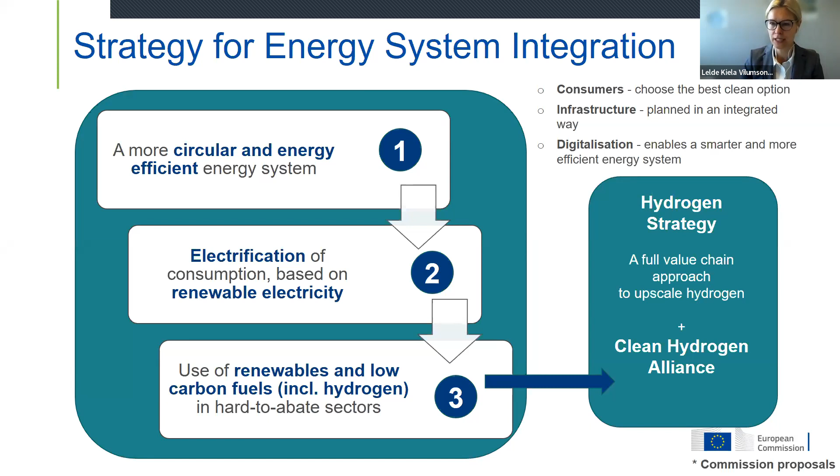And now I will give you a short update on the actions which were also announced in the strategy. I will focus on my slides, given the time limit, just on the key actions which really are relevant for this webinar.

In terms of the first pillar of an efficient and circular energy system, we see that the Commission guidance to member states on the energy efficiency first principle, which was announced in the strategy, was adopted last year in September. It is also key in terms of how we can make integrated systems more efficient.

The energy efficiency first principle is also embedded in the revised Energy Efficiency Directive, which was adopted as part of the Fit for 55 package last July. And the review of the primary energy factor, which was also announced, is in preparation, and it should be adopted by the end of this year.

And then the reuse of waste heat from industry and data centers, which is a key element of how we link together different sectors, industry with heating systems, was also provided or included in both the revised Renewable Energy Directive and the recast Energy Efficiency Directive, also adopted last July.

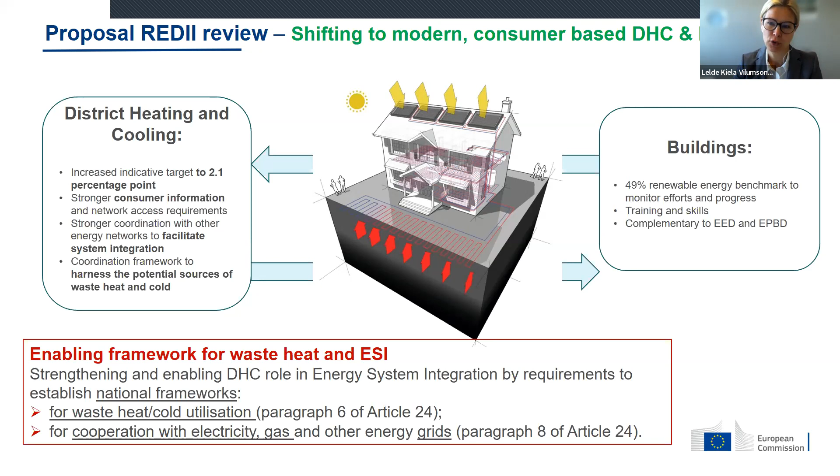And I will now finish here, and you can come up with questions, because I know I don't have much time left. So in relation to the REPower context, it's important, in terms of heating and cooling, to...

acknowledge the really necessary, massive acceleration of renewables in order to shift away from Russia's fossil fuels. And this is clearly indicated in REPower, as Emilie also mentioned. So there is a push for a high penetration of heat pumps, also solar energy.

And for that we have come up with very important initiatives, which I will touch upon in my next slides. And also in terms of district heating, district heating should play a key role when we talk about renovation of buildings, when we talk about renovation of large scale multi-apartment buildings, where we look from the densely populated areas and cities in the neighborhood.

From the neighborhood perspective, we can see how we can modernize district heating by using different fuels and linking it to the multi-apartment buildings and cities, so that we can also ensure different services, for instance, balancing and flexibility by using low temperature, which also allows us to ensure energy savings.

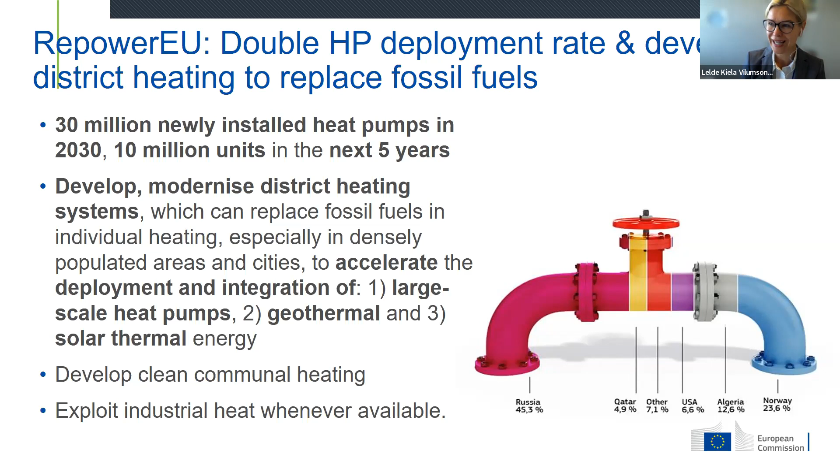So here I'm also putting focus a bit on hydrogen, which doubles the, in terms of the RePowerEU, the focus is also on hydrogen to double the outcome, EU production and imports. So instead of 10 million tons, we are proposing 20, so doubling that, both coming from EU production and imports. And I mentioned also, as part of the RePower plan, we have put forward very important initiatives, EU solar strategy, with the focus and objective to increase, or basically double, the solar energy

across different sectors. And notably, we are talking about buildings, which also, as part of this initiative, we are proposing a European solar rooftop initiative to promote this massive decentralized PV deployment and make buildings ready for solar energy.

And finally, we have proposed accelerating permitting processes, and here it's very important to reduce the permitting times for renewable energy projects, be it solar energy, be it wind energy, and also for district heating, which also integrates renewable energy. And here I will stop, and I look forward to your questions in case you have any.

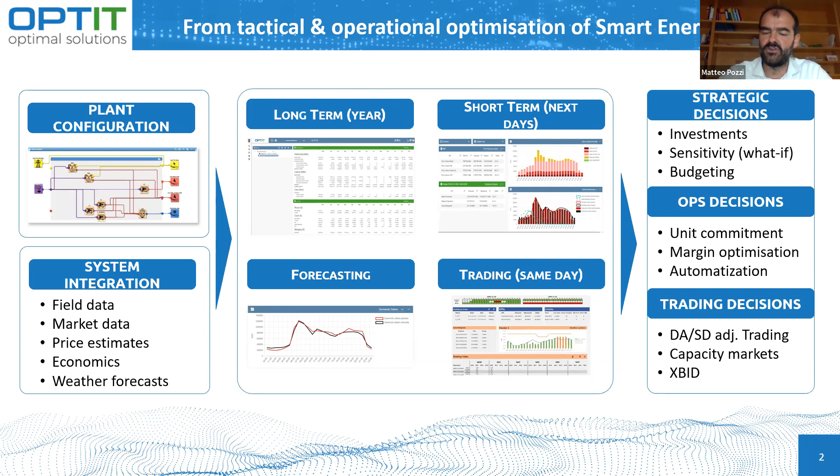So as I said, optimizing and integrating systems at a local level is something I consider relatively mature technology today. But we understand the challenge we are facing is much bigger, and it has to be tackled at the national level at least. It has to do with electrification and electromobility coming into play, and the electricity system being the long-range means of communicating between energy systems that sit at local level, where the district heating system interacts with the overall system.

And this is why, more or less three years ago, we managed to enter and win a Horizon 2020 project called PlaMES, which stands for Planning of Multi-Energy Systems, where our expertise and perspective on district heating would couple with the knowledge and experience of the Fraunhofer Institute and the Technical University of Aachen, very expert on the electricity system, in order to create a model that could take into account the overall demand and supply of multi-energy commodities.

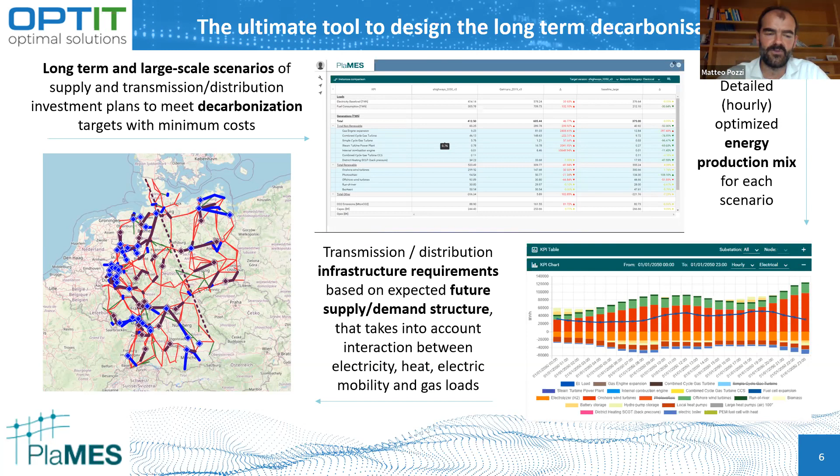Has it been necessary to delimit or specify time, geographical simplifications, and such details? That's a great question, I'm very glad it's being asked. Let me go back to this.

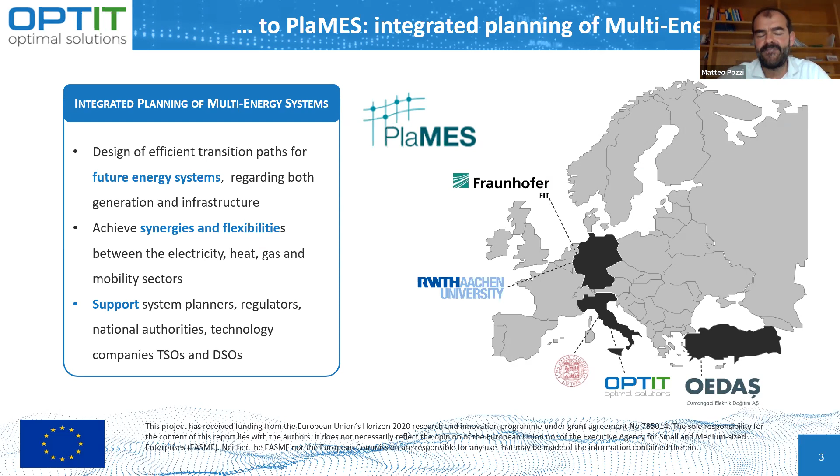The problem was the amount of data being managed and how to actually handle it. When I presented the consortium, I failed to mention the University of Bologna, which was really involved in understanding what could be decoupling and resolution strategies that could achieve results in reasonable time frames. So the big difficulty of the project was defining the structure of data and the resolution strategy to manage this huge complexity.

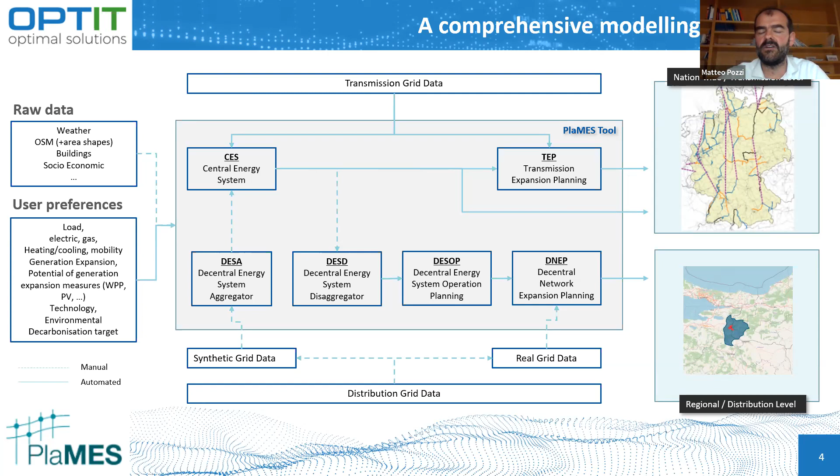Of course, there are some simplifications that need to be applied at some point, but I think we've reached a relatively good balance in terms of times for resolution and management of the scenarios. No one should expect that even though the interface is very handy and looks like you just click a button and get your result - yes, you get your result, but after a few hours.

Behind that click of a button, there is a very intense big data analytics and big data management process, supercomputing assets, etc. But the good point is that after a few hours, you get your scenario and you can start analyzing it, assessing it, and eventually relaunch it again and again. So better a few hours than a few days or months as it used to be.

It still amazes me how far the technology has come. Yeah, these are pretty amazing results. As I said, there are some simplifications being taken when we look at this scale of problems, but we believe this simplification is enough for accurate and significant questions to be answered, which is really the purpose of these tools.

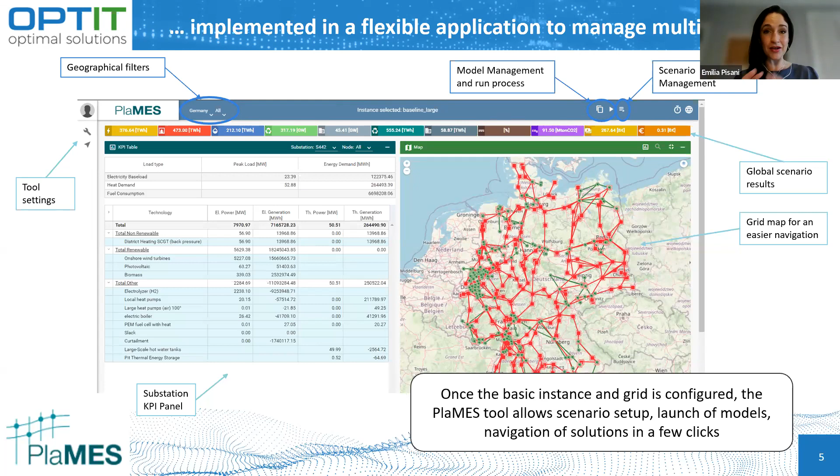Great, thank you for this. And there are more questions, as mentioned - we could spend a lifetime on these issues. But I would like to now move to the last but not least presentation by Marion. Give us a concrete example: how does an integrated, smart system look like to provide sustainable, renewable, reliable energy to end users?

Thank you, Emilia. Indeed, I will tell you something about our Hengelo network, which is the most innovative district heating network in the Netherlands. I am Marion de Dooij, and I work for Ennatuurlijk, a company in district heating in the Netherlands. I mainly work at looking at our operational data and what we can do with it to optimize our networks.

So what I will talk about today: first I will introduce our company, what exactly is Ennatuurlijk. Then I will tell something about our company objectives and our outlook to the future. And then I will dive into our Hengelo network and explain a bit about the developments there into developing it into a 5th generation network.

So first, what is Ennatuurlijk? Ennatuurlijk is, as I already mentioned, a district heating company in the Netherlands. We supply heat and cold to approximately 85,000 residential and 1,200 commercial customers. We only look into district heating networks and district cooling networks, focusing on local and sustainable sources.

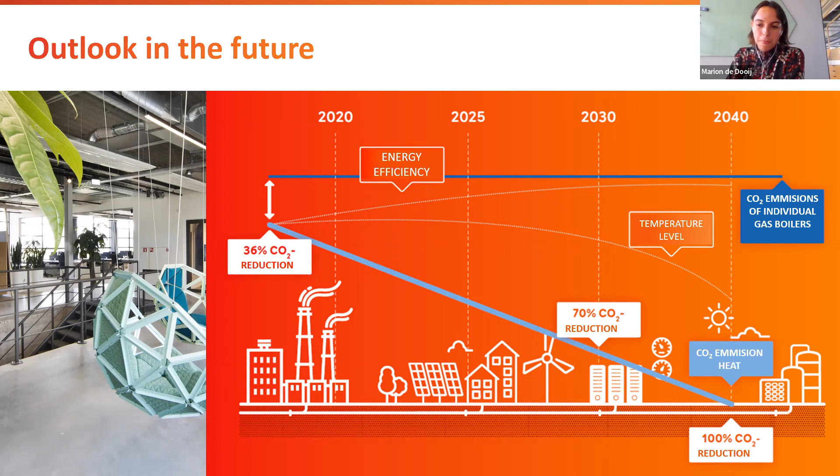As I mentioned in the introduction, the Hengelo network is the most innovative network of the Netherlands.

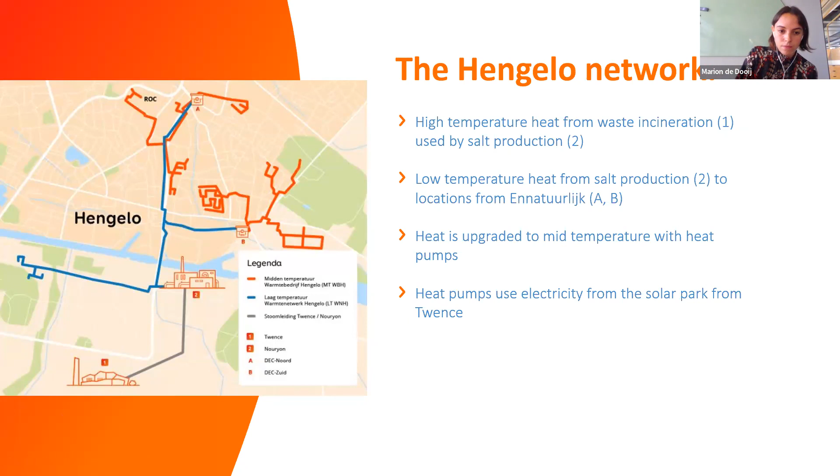There are several developments in the Hengelo network to optimize this system and increase efficiency even more. The first thing we've done is develop a digital twin together with Gradyent. A digital twin is a digital model of the network, which we use to calculate the most optimal set points for the district heating network.

One thing we are doing is using dynamic forward temperatures to match the demand of the network at a given time. We also use this model to calculate the most optimal functions for the heat pumps, looking at how we can use them in the most optimal way.

We can also use this model to find any places in the network where there are still possibilities to optimize. For example, we can identify bypasses, or customers with a customer-side installation that doesn't function optimally, meaning they might have high return temperatures, which lowers the COP of a heat pump.

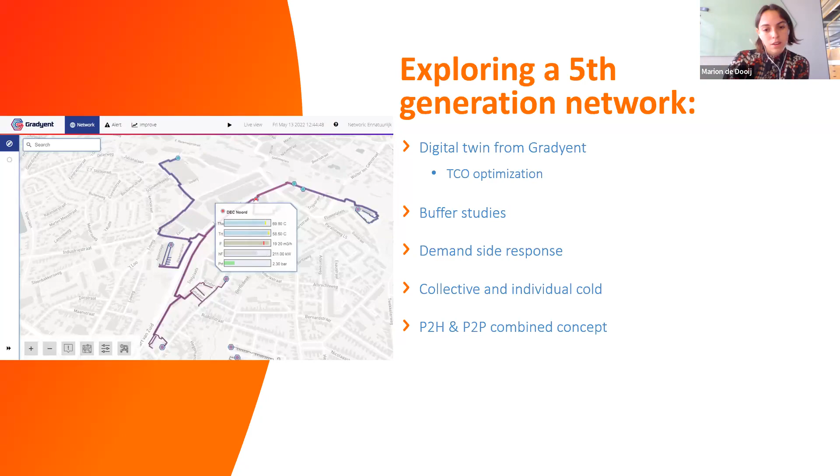So that's my presentation. Are there any questions?